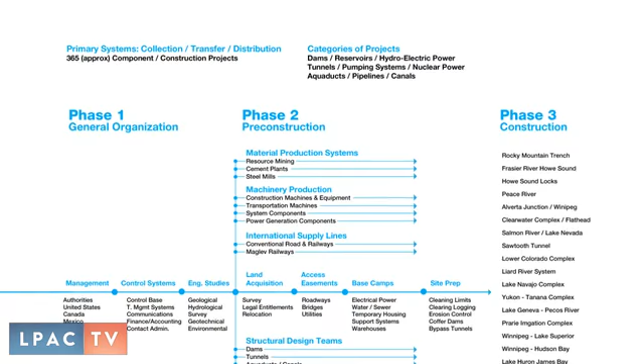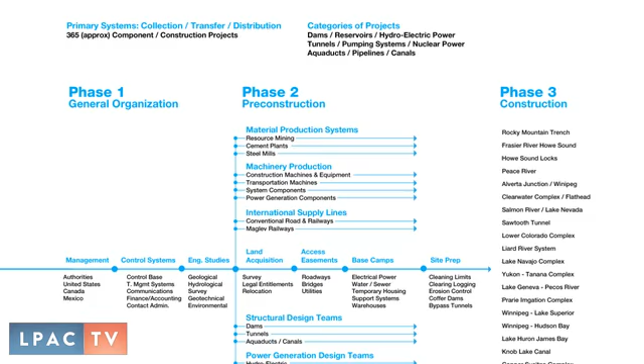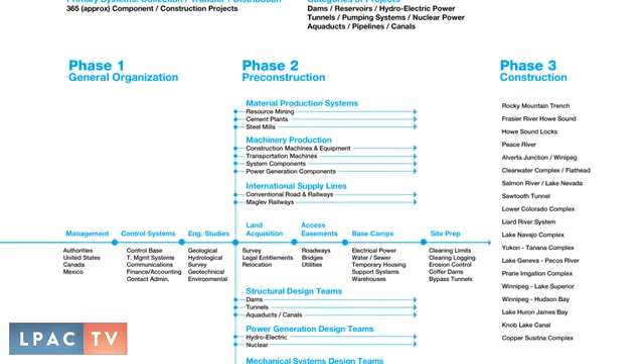And here in this section, we outline the project as though it's already built. If you read this, you get a sense of, in your own mind, everyone actively working, moving, and how the system is going to look like when it's actually completed. This is called the system requirements of NAWAPA 21.

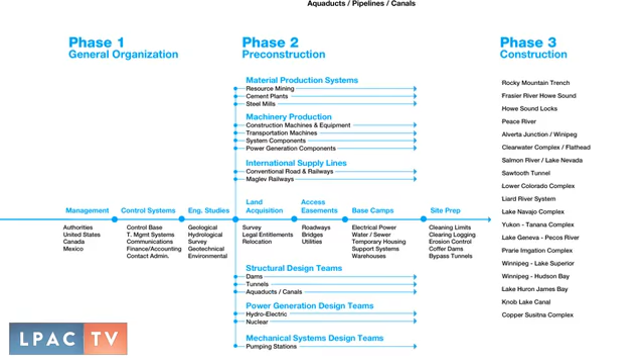Now, it has 4 phases. And all these phases are going to be interlapping in some degree, but relatively are going to be moving independently, and one has to be completed before the other is finished.

Then we're going to look at what's our current capacity to accomplish these phases as our economy stands right now, followed by what kind of technologies we could implement now so that in the certain phases later of the program, they're going to be available to help us speed up the timeline of the program and the quality of the program and the quantity of things produced, which will affect the timeline of the program.

Concluding with an investment analysis of the project, and that's going to tie into the first phase, which is general organization of this whole system. This is a continental flood control, drought control, and general water delivery, water regulation system. This is the skeleton of the whole plan.

In this plan, it's going to open up whole developments in resource development and in the colonization of and settlement of new parts of the continent we haven't touched before, made accessible.

This general organization of this whole system now is going to include management teams, and what they're going to be doing is they're going to be essentially setting up, as we did with something like the TVA, a grouping that's going to get the top-down overview of the whole project.

And they're going to figure out as they do that somewhat of the best way, the plan, what should be done first, the order of operations.

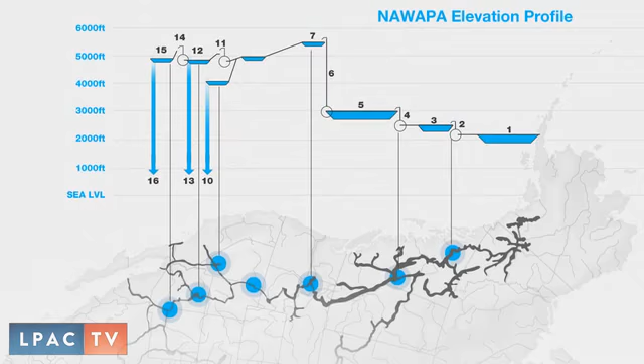In addition, before anything even gets built or authorized, we're going to have topographical mapping of the whole plan updated. We've done some of this ourselves, using software to look at how these reservoirs are all laid out with the elevations, and essentially how the natural topographical features of the continent mean we don't need any canals or aqueducts in the entire collection system.

In the engineering phase, just the geological mapping phase, we can get a much more in-depth picture of how this whole system could work. With new technologies and new tunnel boring industries, we could even change the original route due to things being made accessible that weren't accessible before.

We may also be able to apply things like LiDAR and other satellite imagery that will give us a much clearer picture of the geology and what the route should be for the program than was the case in 1964. We're going to have biologists looking at the reservoir effects.

We're going to have foresters looking at the harvesting of all the lumber as site preparation begins later in construction. We're going to have all these kinds of scientists involved in this general mapping.

We're also going to have people designing, based on that analysis, what these pump stations are going to look like, what the dams are going to look like. Civil engineers, cold weather engineers, mechanical engineers, all kinds of engineers you can think of, and material engineers - what kind of cement are we going to use? Are we going to use the roller concrete method, or other methods? What other new technologies can be put to use?

We'll probably have to have some rail routes also in the Northwest, especially some rail routes in Idaho. We're going to have some extensions on the Burlington Northern Santa Fe routes that we have - triple tracking some routes, double tracking others, because we're going to be moving a lot of supplies, especially from the Midwest.

This is where we still have a lot of industries. So as we gear up these industries now, we're going to have to use new routes, new bridges, and other things. We're going to need geophysical engineers, civil engineers, iron workers, form setters, and big cranes, 500-ton cranes. We're probably going to have to get some new crane manufacturing going in the United States.

We're going to have to get a lot of different material construction going in the United States. This includes material production, cement production, steel mills will have to be built, foundries, and other things needed for rock crushing. Anywhere we're pouring cement, which will be a lot of places given the number of dams in this project, we'll have to set up new quarries. The rock crushing facilities alone will be a very profitable business. We're looking at a whole array of material production.

Then we have machinery production. All kinds of machines, cranes, excavators, tunnel machines, all this machinery is going to have to be built. As for tunnels, there's going to be almost 1,200 miles of tunnels.

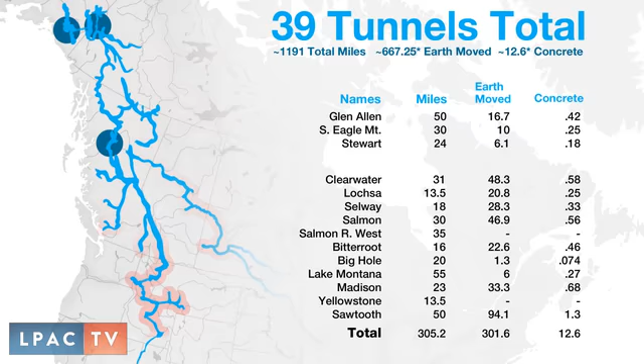There are 39 tunnels in the project, most of them in Idaho, Montana, and the Southwest. This is where, as we go through the topography of the Rocky Mountains, Idaho, and into the distribution, we're looking at a lot of separate reservoirs, separated by 40 to 50 mile tunnels in some cases. We're going to have to get a lot of tunnel boring capacity in the United States.

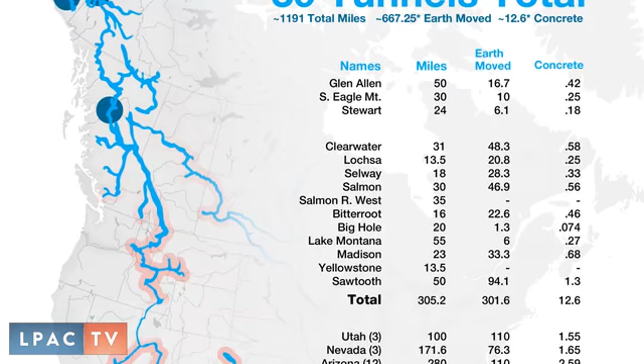This could be a big push, a big push for R&D in the United States. The U.S. tunnel boring industry could surpass anywhere in the world given the amount of tunnels needed for this project. That's 1,200 miles of tunnels, almost 13 million cubic yards of concrete, almost 670 million cubic yards of earth moved. Then there's pump manufacturers.

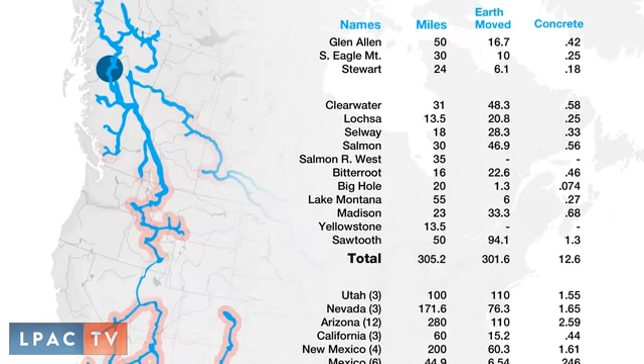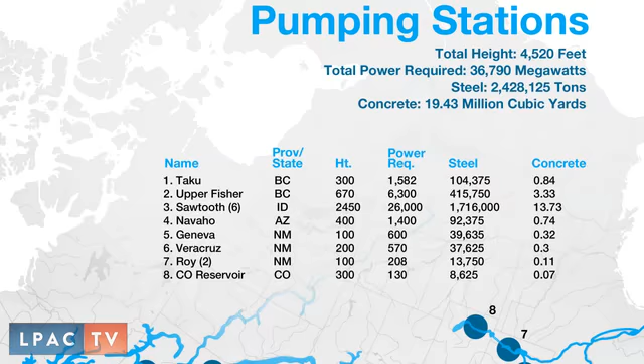Right now we don't have a pump manufacturer capable of this task. We may have to get a license from Hitachi or something until we build this capacity in the U.S. With these massive pumps, there's going to be a lot of foundry casting and forming work. We need to revive this in the United States, since most of our foundry casting is currently done abroad.

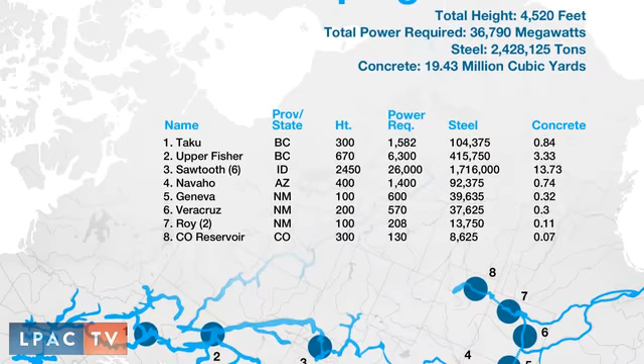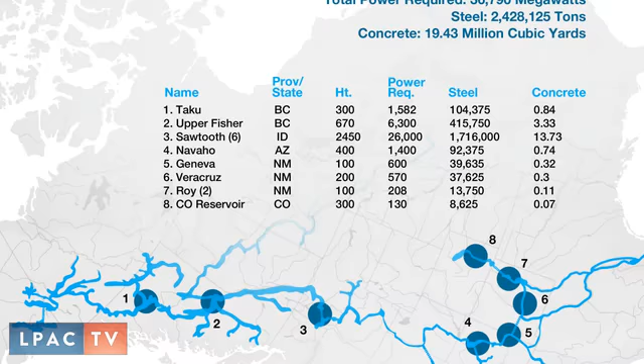With these pumps, this is bigger than just getting our own big pump manufacturer. These are 100,000 horsepower pumps, and there's going to be an army of these, given the current design of the Sawtooth lift and some of the other big lifts in the project.

We have four major pump lifts: one in northern BC, one in southern BC into the Rocky Mountain Trench, the whole Idaho transfer function which is a continuous pumping system, and then one out of Lake Navaho in Arizona.

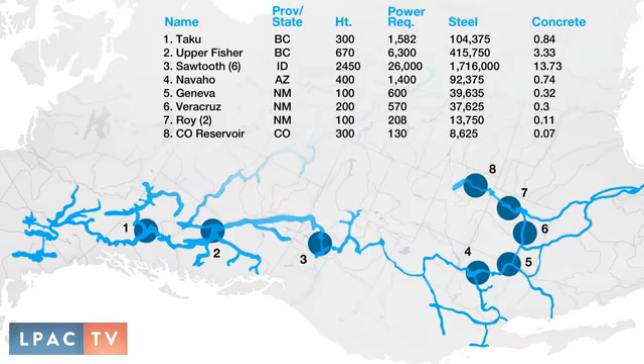These pumps are going to be massive, 100,000 horsepower, bigger than any pump we currently have. We're going to have almost 37 gigawatts of pumping facilities in operation, almost 2.5 million tons of steel in these pumps, and almost 20 million cubic yards of concrete. There will be about 14 major pump stations, each with a lot of pumps.

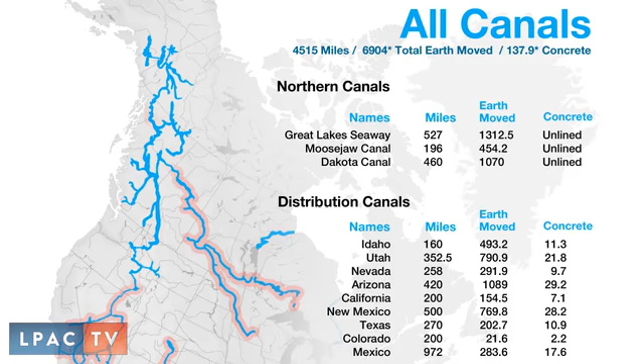Then we're looking at all the other machinery involved, machinery production for canals. We're going to have a lot of excavators and a lot of cement pouring going on, equal to 130 million cubic yards of concrete, almost 7 billion cubic yards of earth, for 4,500 miles of canals.

So we may need some kind of technology investment in canal excavators, given the amount of tremendous canal excavating that's going to be going on. We may want to have some advancement in that area.

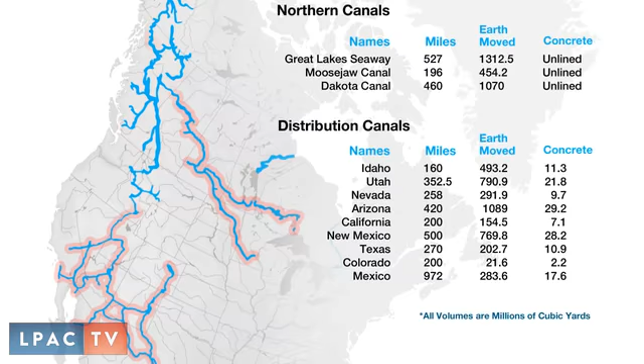Also, the supply lines. As we bring in this massive machinery and construction equipment to these areas, we're going to need things that you don't see a lot of in the United States, like Schnabel cars. These things look like giant insects moving down the track, with a capacity of about 150 tons. We're going to need to build a lot of these, along with heavy capacity track as well.

So what we're looking at, with all of this - the pumps, the canals, the tunnels, the power stations, the locks, the dams - the total amount calculated so far, and this doesn't include some of the eastern stuff not included in this design, we're looking at about 27 billion cubic yards of earth moved, almost 3 billion cubic yards of concrete, and about 400 million tons of steel.

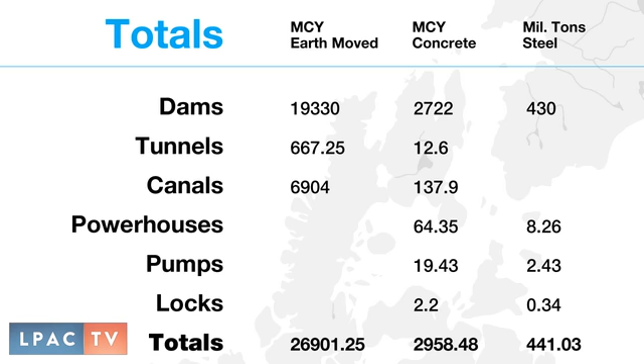Phase 3 is the construction of all of that, bringing all this material and constructing it, which is going to have site preparation, clearing, logging, diversion tunnels, cofferdams for each dam. Obviously, all of this construction is going to have its own phase.

Now these phases are going to intersect. We're going to have, some years into the project, a beginning operation phase. This control center I went through originally is going to first get a sense of all the pre-construction needs - how quickly we can advance the pre-construction phase, investments into plant construction, and investments into training all of the different engineers involved. As I mentioned: pipe fitters, cement workers, iron workers, millwrights, switchgear workers, linemen, machinists, lathe operators, and all the different kinds of engineers - professional engineers, mechanical engineers, nuclear engineers - everybody involved. We're going to have to get a sense of what the training needs are and what the plant capacity needs are versus the capacity we can have.

So that grouping at the control center will be analyzing all of that, figuring out how it's going to work. They're also going to begin, as certain parts of the project come online, the operation phase, which is the fourth phase of the project.

The operation phase - you can have in your mind an image now of all of this in motion, with the beginning parts of the project coming online. You can picture the grouping that's getting a sense of this whole project. As it starts to become actualized, they're going to be monitoring the condition of every single reservoir.

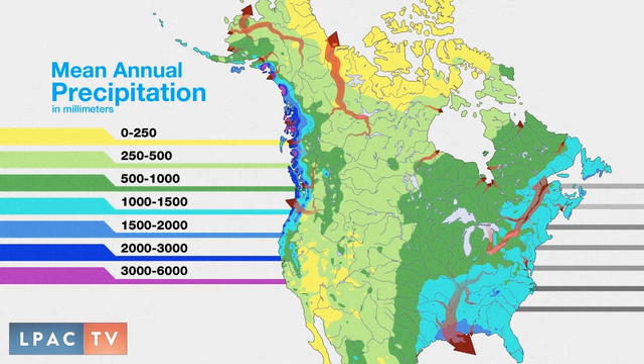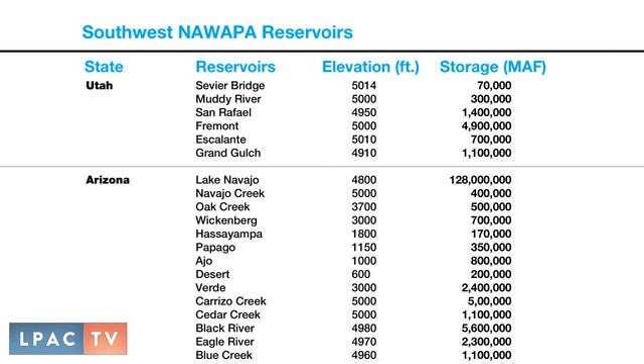This grouping is also going to look at water treatment of the reservoirs. They're going to be studying techniques of limiting evaporation in the Southwest - though possibly we may want to let more evaporation take place once we have the system in place and more security for our water, so we can transform the environment. That's the other thing the operation phase is going to be doing: working with certain groups on promoting certain kinds of land cover to maintain desired moisture and evaporation rates in the Southwest.

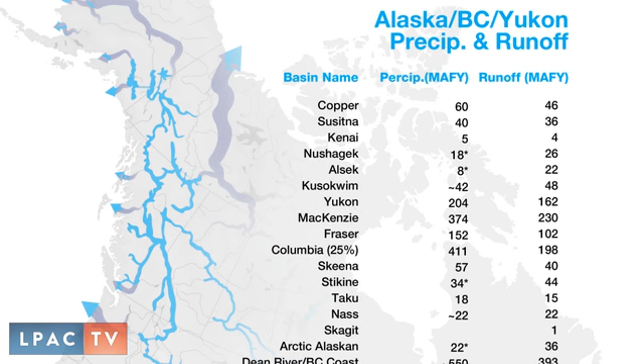It's been shown that the evapotranspiration of plants can be affected by large reservoirs in arid regions, which can themselves change the moisture in the area, causing changes in the weather or accelerating changes already going on, and changing precipitation rates. So what kind of land cover? They'll be working with this NAWAPA 21 authority on distributing water for certain agricultural and forestry needs based on scientific analysis, with certain groups working on that.

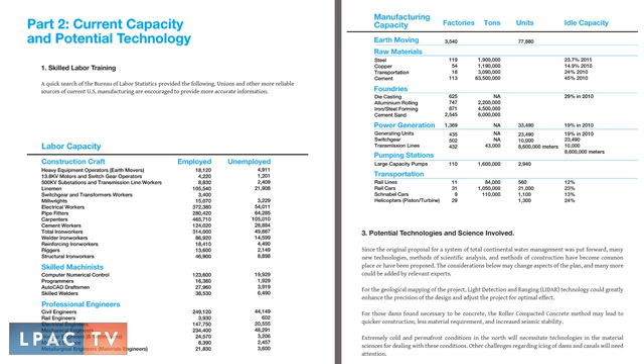So these are the four phases. Again, we're going to have to look at these phases in relation to a couple things. One, the labor capacity we've just outlined with preliminary analysis using the Bureau of Labor Statistics - which everybody knows is fairly underrated and has a lot of fakery constantly going on - and the same with machinery and manufacturing capacity.

But even looking at that, you can see we're going to need to bring a lot of this engineering and machinery online. We're going to have to gear up, in a sense, as though for a war, creating a new generation of workforce. What we're beginning now is a process such that a preschooler today, when they finally graduate from high school, will be moving into an area of employment, skill, and opportunity - not just the construction of this project, but all of the things we can open up.

That leads us to one of the most important parts of this whole process, which is the investment analysis of this control center. In the beginning phase, they're going to be bringing in all the data: what's our plant capacity, our labor capacity, our current status of technology and infrastructure, current manufacturing technology, and our scientific know-how, our knowledge.

These are the resources they'll have at their disposal in collaboration with certain government organizations. Driving a project like this requires a certain amount of foresight and forethought.

As they lay out these stages, each stage has to be ready to move seamlessly, so that when we put into the skill and training mode, and into the technology manufacturing early on, we invest in the future technology we're going to need. It may not be applicable right away.